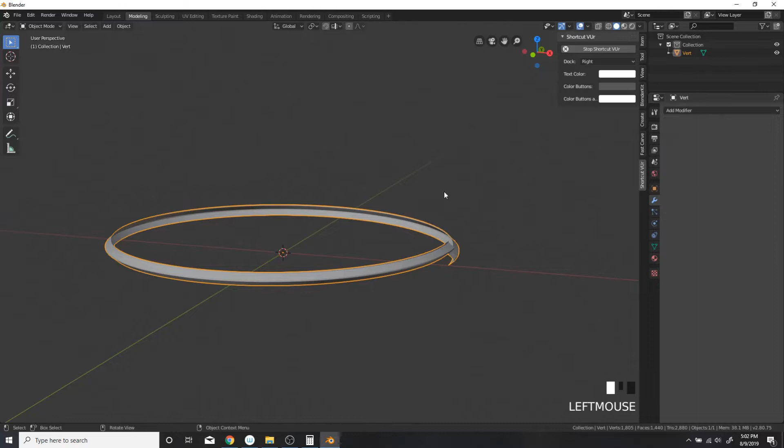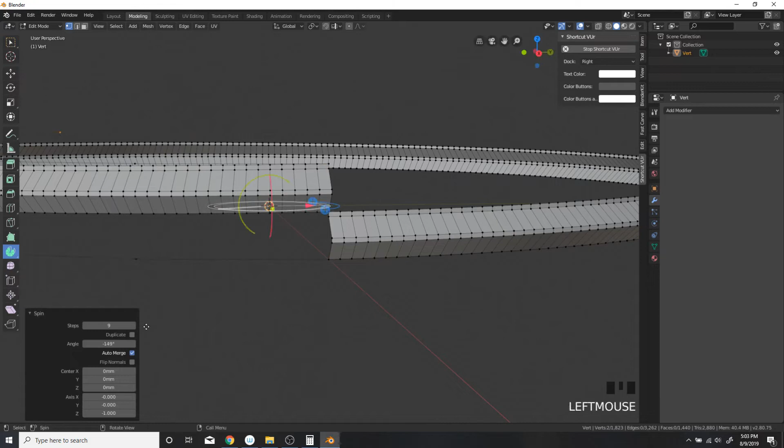Go to edit mode. I'm going to select these top vertices and this bottom one. And then I'm going to do a spin, 360 steps and an angle of 360.

I'm going to select these vertices and this loop and remove this one, and I'm going to do a bridge. I'm going to do a bridge. I'm going to do a bridge. What the? I'm going to select all and do a mesh cleanup.

Merge by distance. And I'm going to select these vertices and select these vertices. Remove these and do a bridge. I'm going to also select this loop and this loop. Remove, remove, do a bridge.

Then I'm going to go to edge, select edges, do a loop cut by 3. Select these edges, do a loop cut by 3. Then I'm going to align these edges.

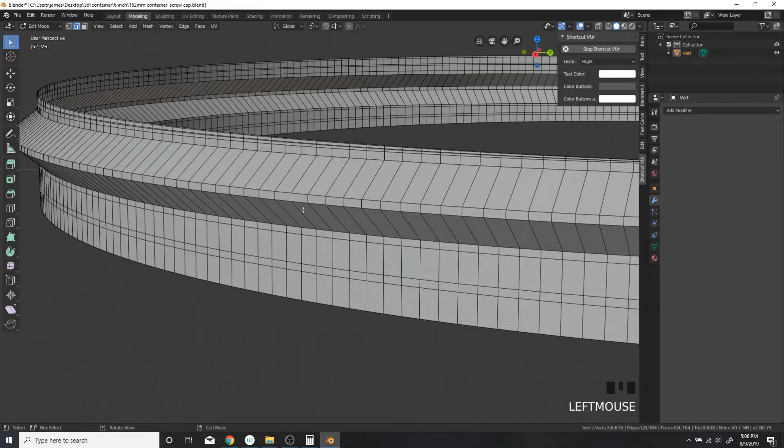Go to edge mode. Select this edge and cursor to selected. Then I'm going to select these again. Go to the top view. Have the pivot to 3D cursor and rotate it, negative 3.5.

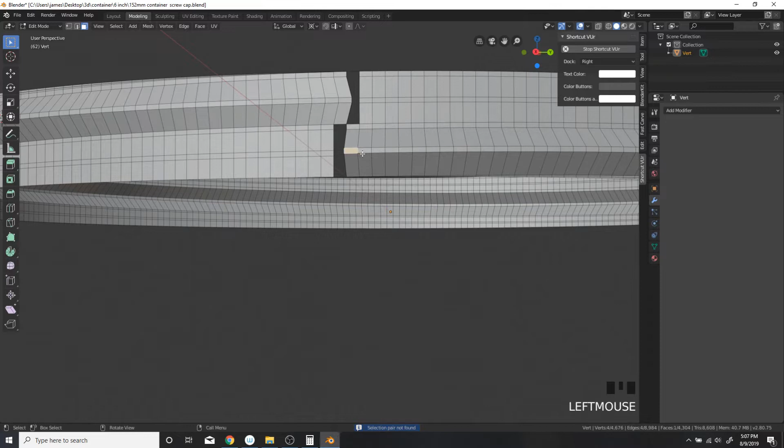I'm going to select these faces: 2, 3, 4, 5, 6, 7, 8, 9, 10, 11, 12, 13, 14, 15, 16, 17, 18, 19, 20, 21, 22, 23, 24, 25, 26, 27, 28, 29, 30. So again, 30 faces.

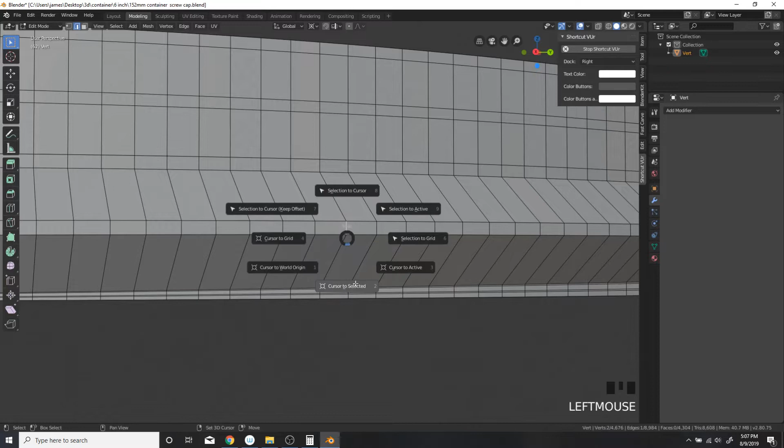And then I'm going to go to edge mode, select this edge, go to cursor selected. Again, select these faces. And then go to top view, rotate 3.5.

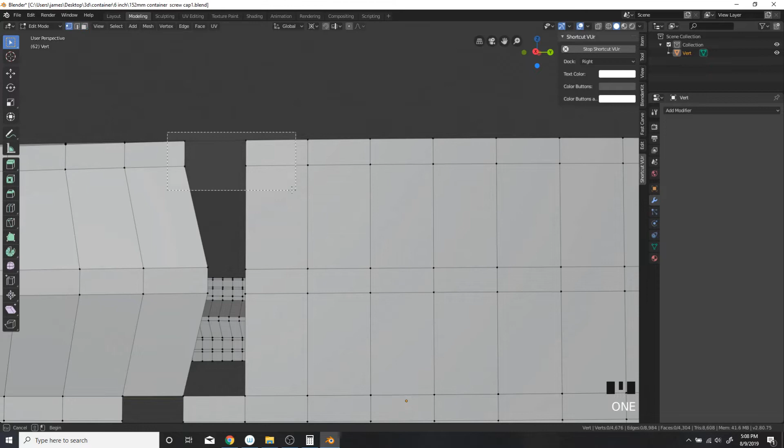Then I'm going to select these faces. I'm going to create faces. Face.

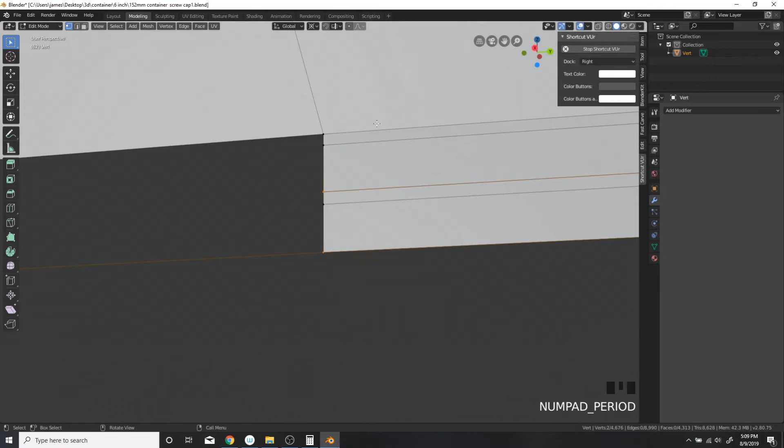Make sure you get the faces on top. Create a face. Zoom in, select those vertices, and create another face.

I'm going to select this loop on the top, and then go ahead and extrude it by 2.5. I'm going to select these bottom vertices and extrude it on the Z by negative 2.5. I'm going to zoom out, go to the front view, select everything, and move this on the Z axis by 2.5.

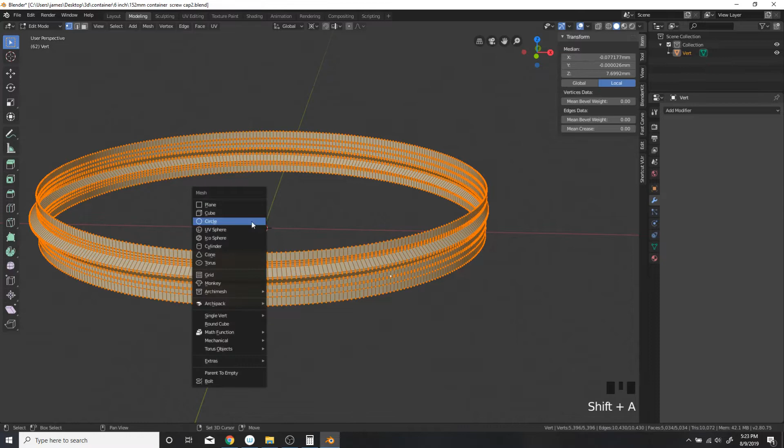Then I'm going to go to cursor to world origin, and I'm going to go ahead and create a circle, 360 for the vertices and 69 for the radius.

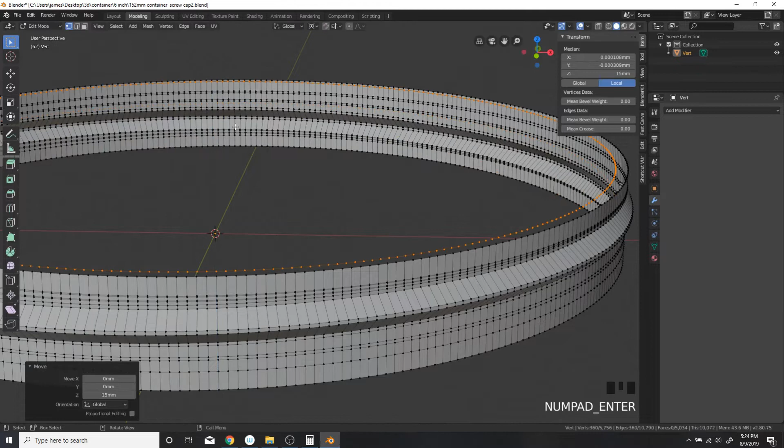Then I'm going to press G, actually move it on the Z axis by 15. And I'm going to select these loops together and bridge them. Then select the bottom one, the innermost loop, and extrude it on the Z by negative 92.

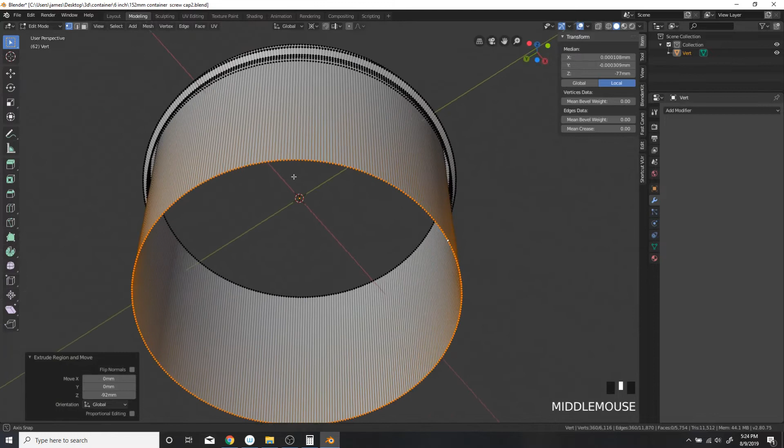And then I'm going to go ahead and create a face. And then create another circle. This one's going to be 76, 360 vertices.

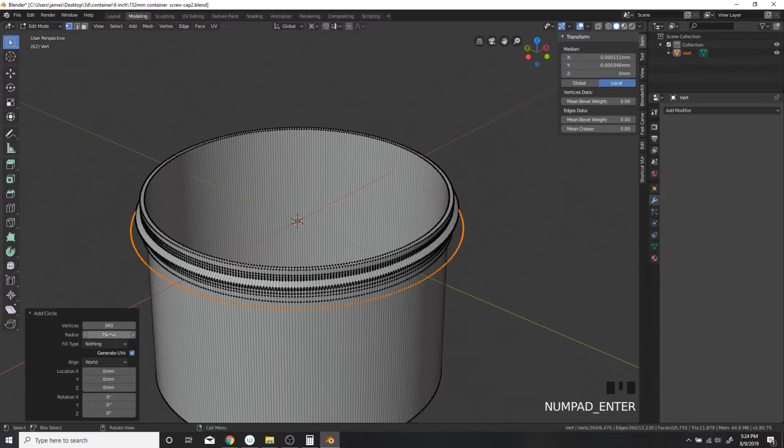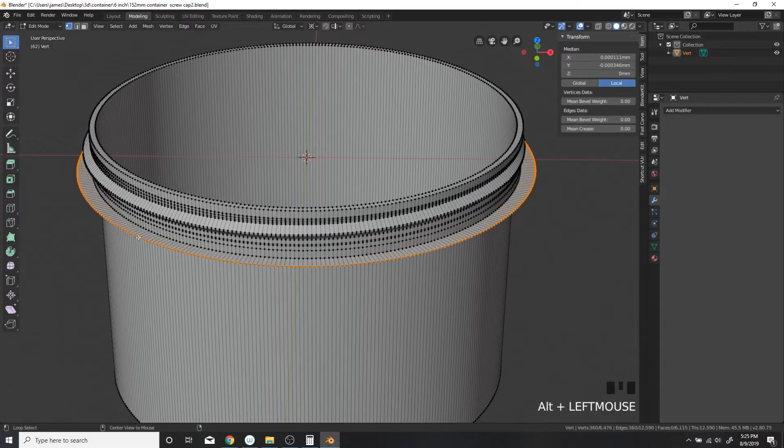And I'm going to go ahead and select this one and this one and bridge them together. And then select this loop right here and extrude on the Z by negative 80. And I'm going to go ahead and create a face.

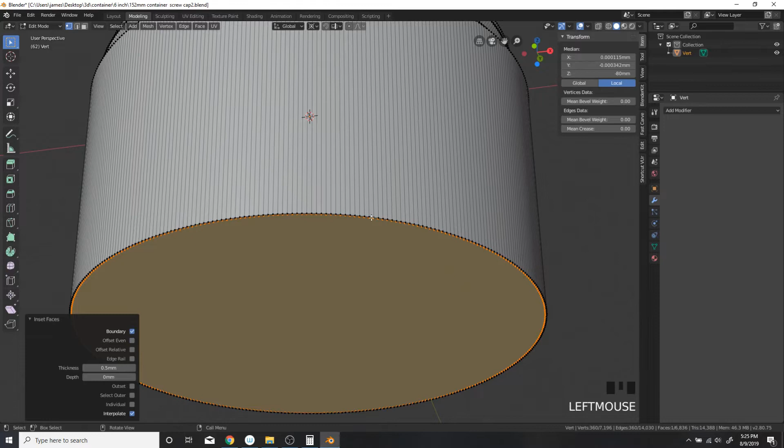I'm going to do an inset of 0.5 and make sure this offset even is unchecked. I'm going to go to the front view, go ahead and do the x-ray, and that's okay.

Okay, I'm going to hide this, go to object mode, and then go to the front view and add another vertex, a single vert. Go ahead and move it on the x-axis by 71.5.

And then extrude 2.5, 0, 2. Extrude on the Z by 0.75. Extrude negative 2.5, 0, 2. And extrude on the Z by 0.25.

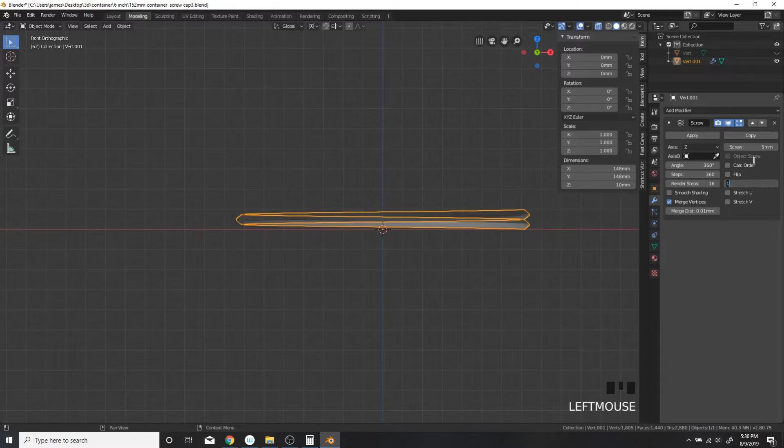I'm going to select it again, go to object mode, go to the screw modifier: 360 steps, 5, smoothing off, merge vertices, and an iteration of 1. Click on apply.

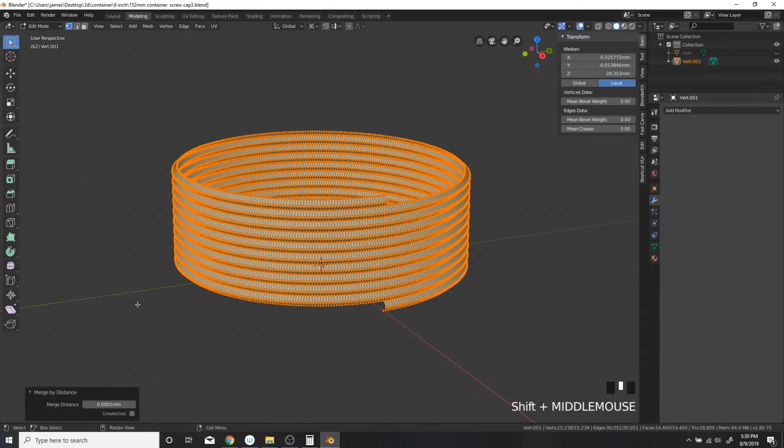Toggle the x-ray off, and then I'm going to do a mesh cleanup, merge by distance. Then go ahead and create—actually you want to go out of edit mode, go to object mode, create a plane. 400. No, 300 is okay.

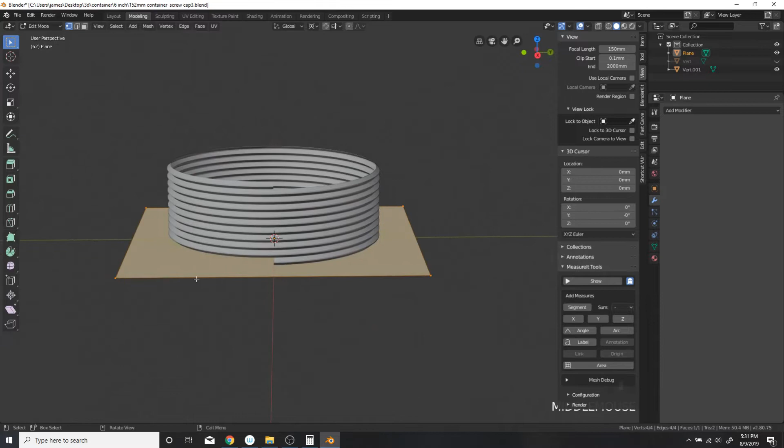2000. Actually, 200 is okay too. 200. Go to edit mode, and then extrude it on the z-axis by 15. Then select all, and move this on the z-axis by 5.

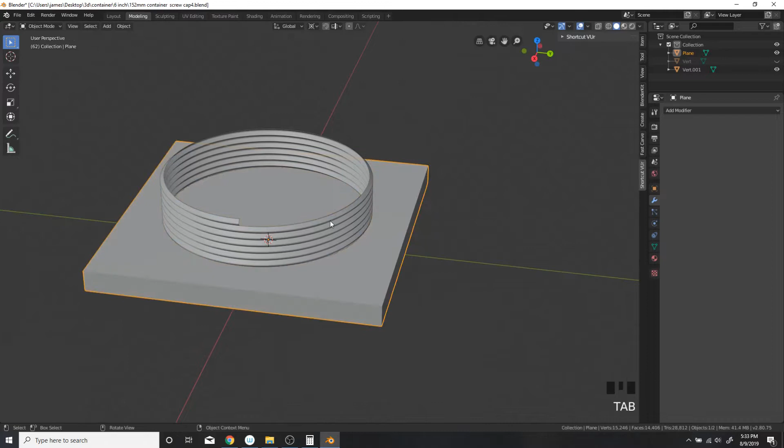And then go to object mode, select the screw, add a modifier, boolean, union—no, actually intersect. Go ahead and use the plane, apply, and then delete the plane.

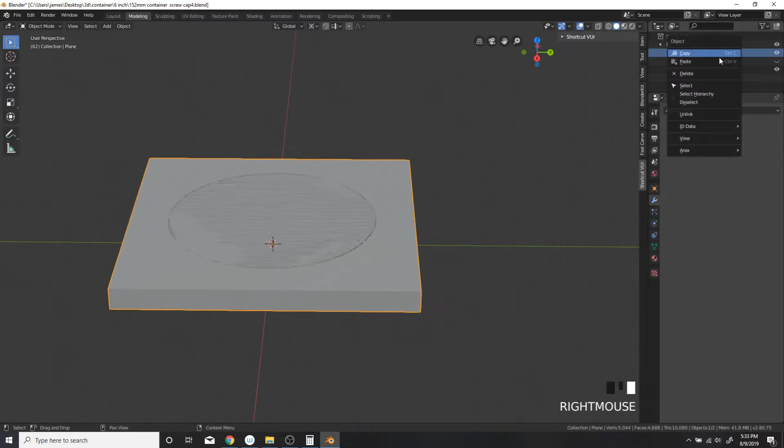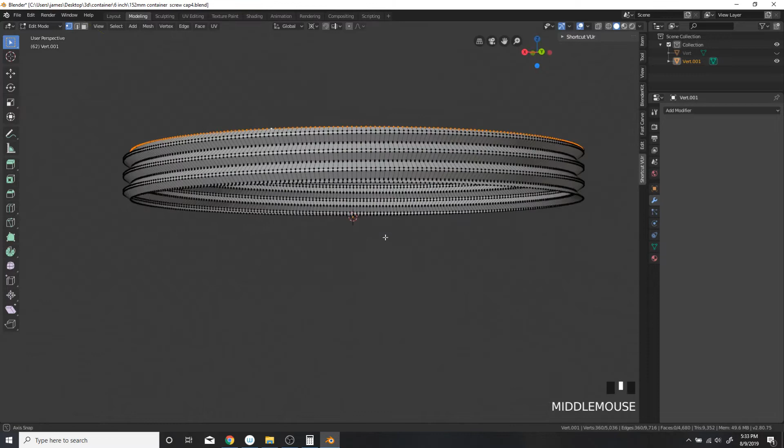And go to edit mode. I'm going to select this face and this face, and then go ahead and delete the faces. 1, 360. It shows that I have 360 vertices right here.

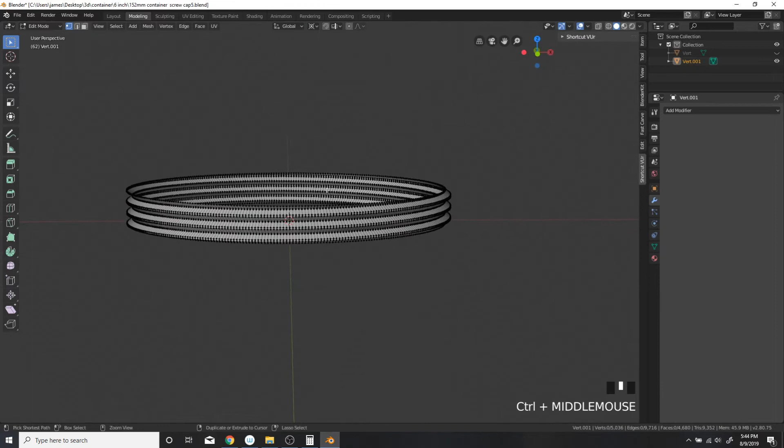And then select all, move it on the z-axis by negative 5. Okay, I am going to select these vertices, extrude it on the z-axis by 6, and create a face.

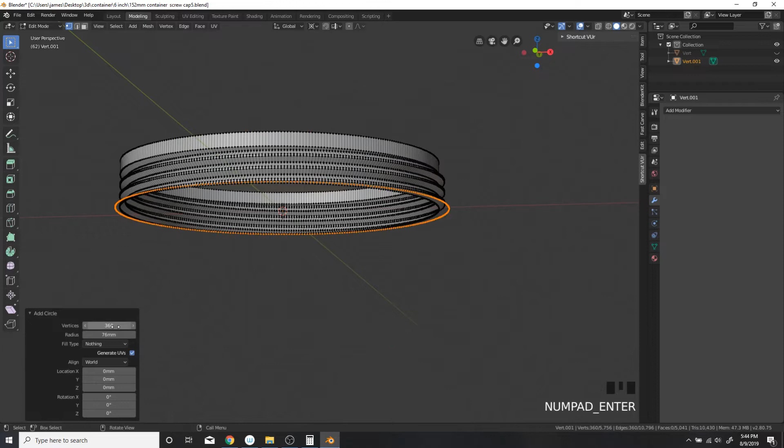And then I am going to create a circle, 360 vertices, 76 millimeters, and I'm going to bridge it together. Bridge. Then go ahead and extrude on the z-axis by 24.

I'm actually going in increments of 8: 8, 16, 24, and so forth for the exterior wall, just because I want to put an 8mm tile on the side for the design. If you don't want any exterior design, you can change the height to anything you want.

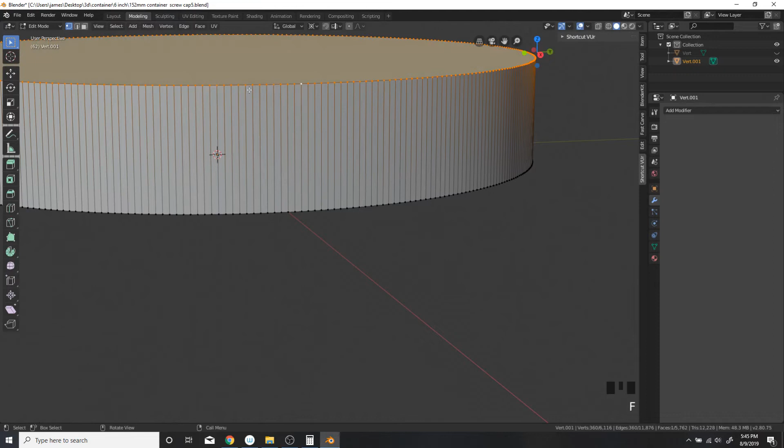And then I'm going to create a face. Then we go to this one, Alt Z, toggle X-ray. Okay, it looks okay.

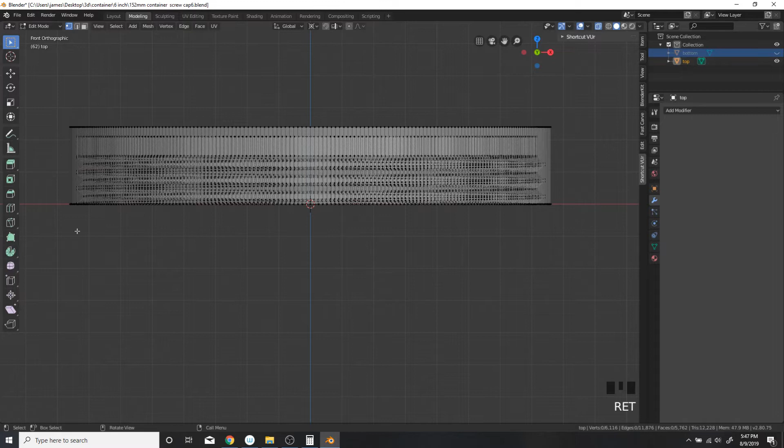I'm going to rename this top, rename this bottom, and then go to object mode, hide this, and create a plane that's going to be 4mm. Zoom and top view.

Edit mode. I'm going to delete only the faces, and then subdivide this into 5 number of cuts. I'm going to create a face.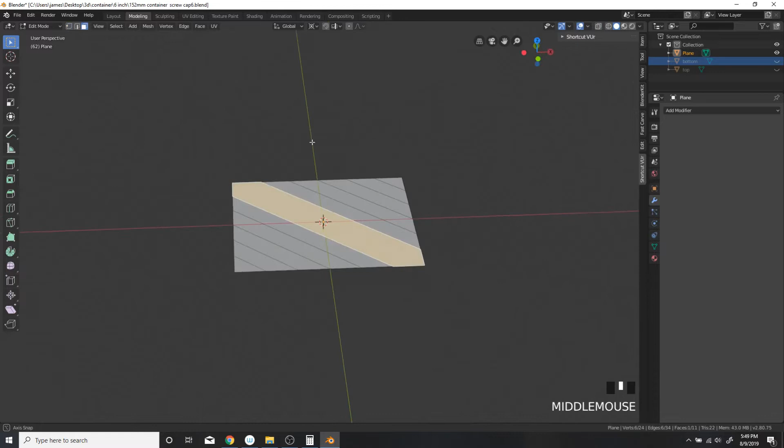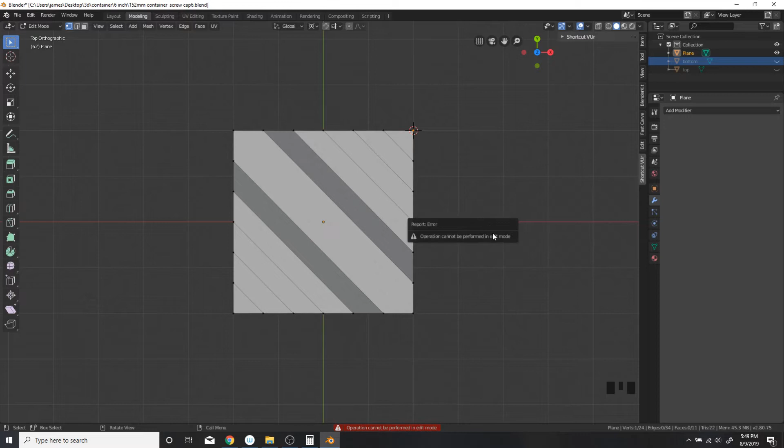I'm going to select this face, move it on the z-axis by 1. I'm going to select this vertex, cursor to selected, set origin to 3D cursor, go to object mode, set origin to 3D cursor, and add a modifier, mirror, on the X and Y, merge, and click on apply.

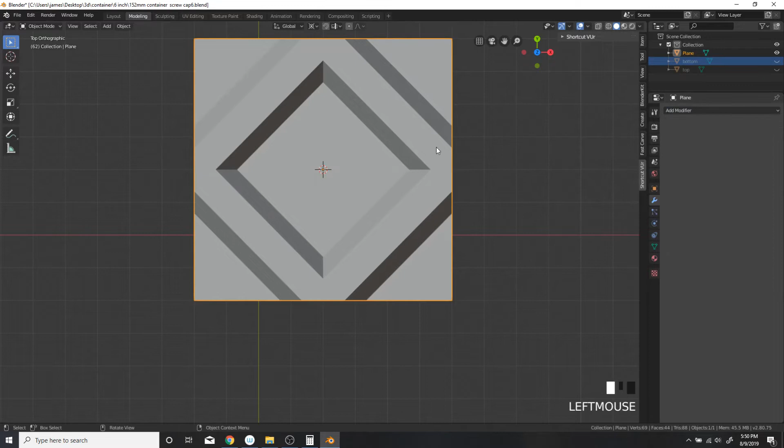I'm going to rename this tile.

I'm going to rotate this on the x-axis by -90 degrees. Press Ctrl-A and zero out the rotation. So this was 90 before, it's 0 now. Let me go to the front view.

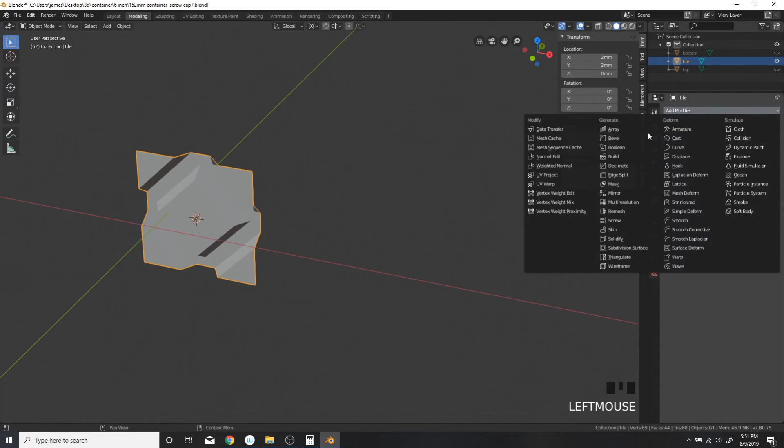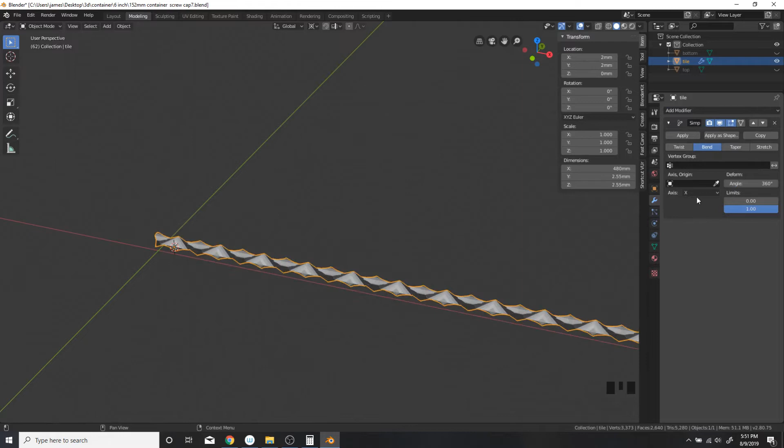I'm going to add a modifier, array, a count of 60. Then I'm going to merge and apply. Then I'm going to do a simple deform, bend, 360 on the X. Click apply.

Then I'm going to duplicate this object. Make sure this link is unchecked, and then hide one. Then I'm going to add a modifier, an array.

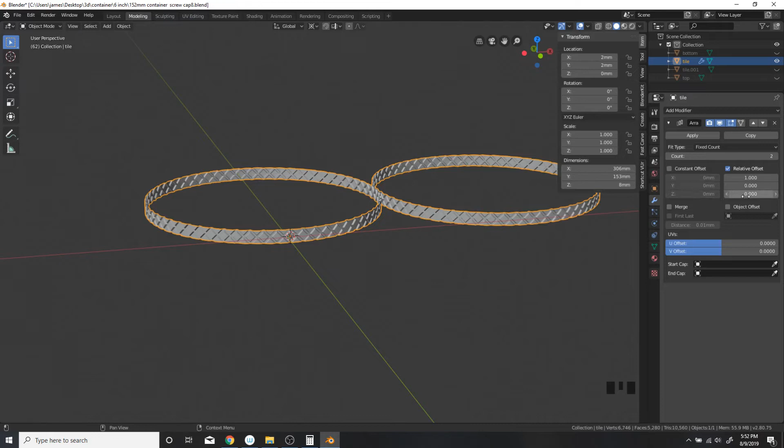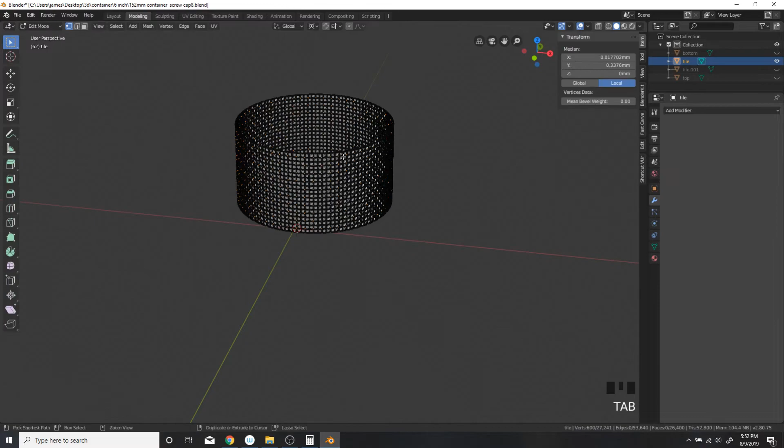This one's going to have an offset of 0 on the X, 1, with a count of 10, and then merge and apply. Then I'm going to set the origin to geometry. I'm going to select all and do a mesh cleanup.

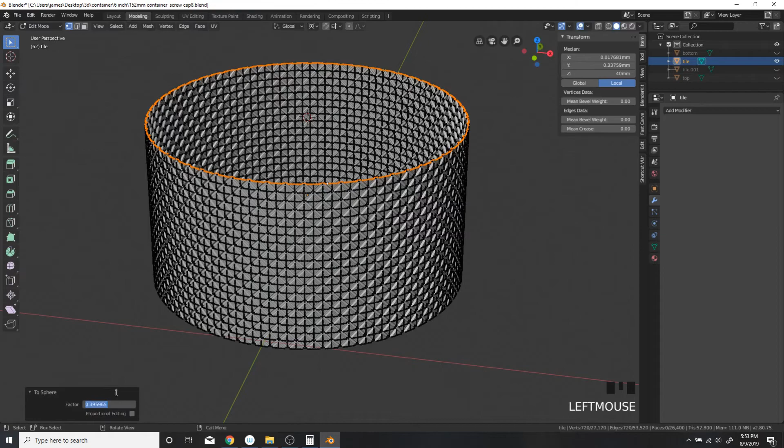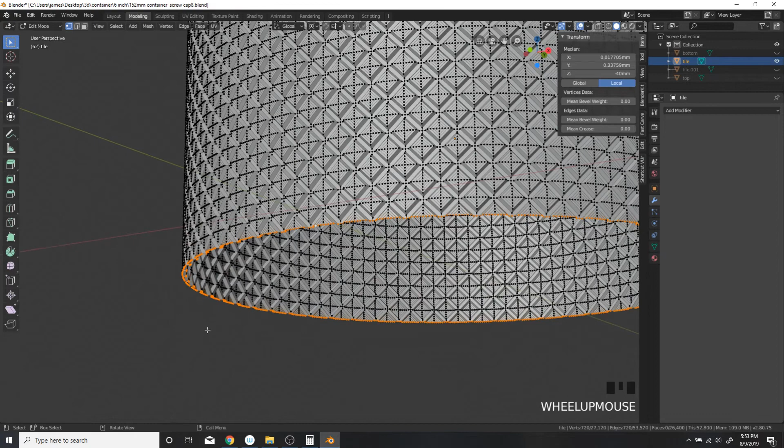Then I'm going to select this top loop, cursor to selected, Alt-Shift-S to sphere, factor of 1. Then I'm going to select this bottom loop... I'm going to select this bottom loop, put the cursor to selected, Alt-Shift-S, factor of 1.

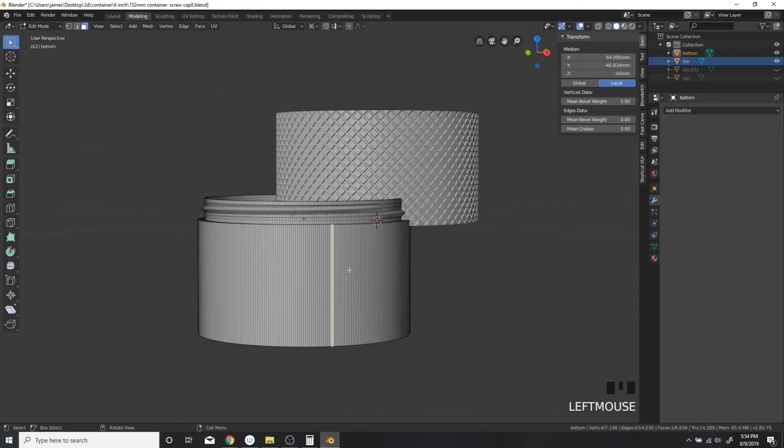I'm going to unhide the bottom. I'm going to select these faces, then cursor to selected, and then delete these faces.

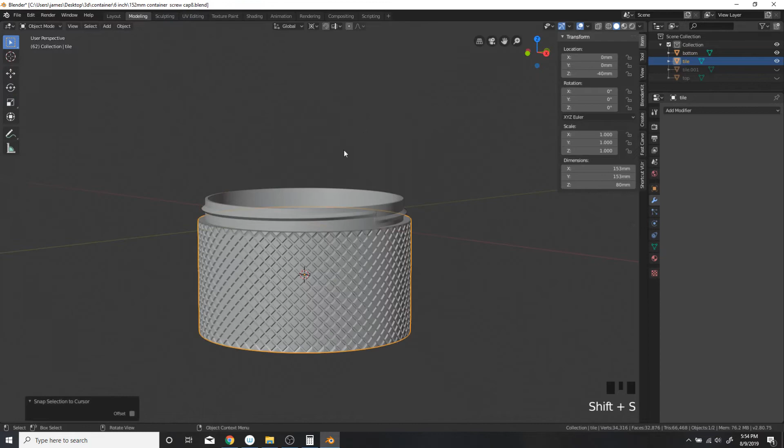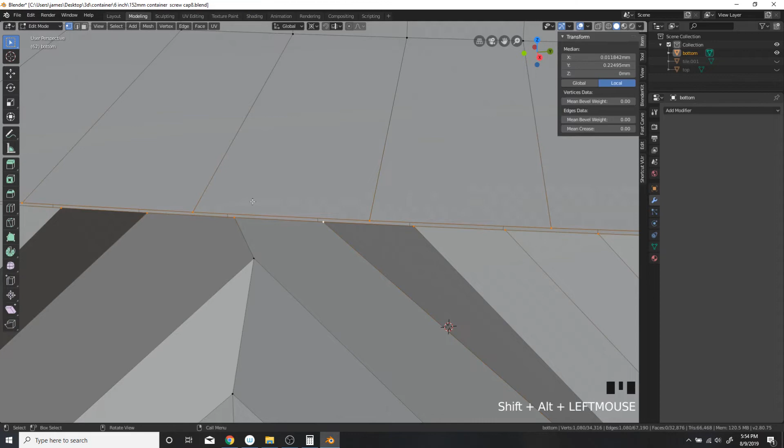I'm going to go back to this tiled object, then selection to cursor. Then I'm going to click on both objects and Control J to join. Go to edit mode, then bridge these loops together.

And then the bottom, bridge. And there you go, we have the bottom piece.

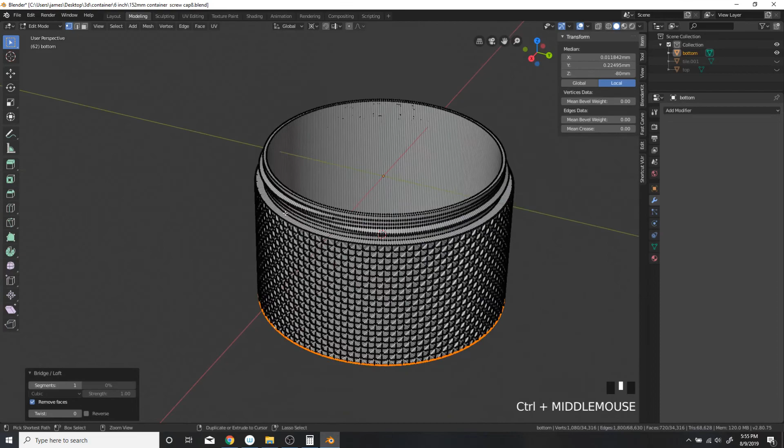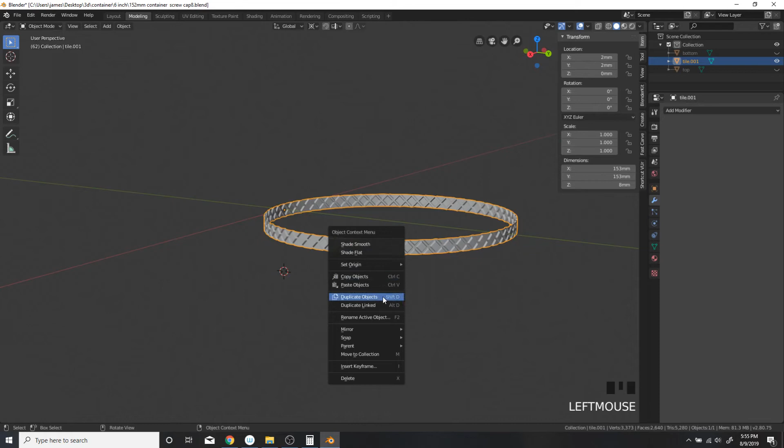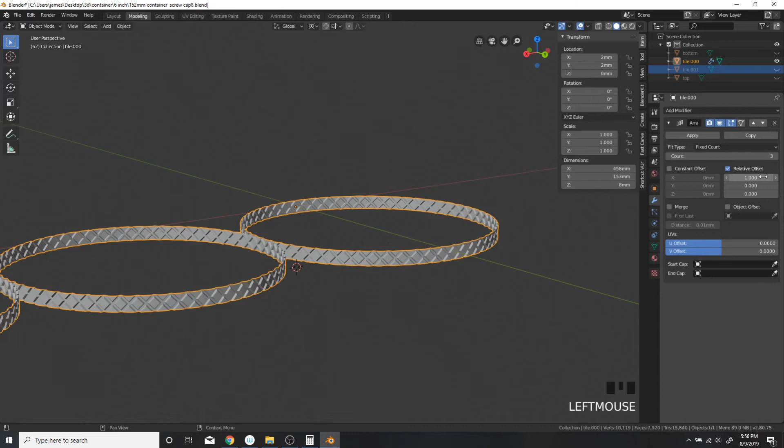Go ahead and create another array. A count of 3, 0 on the X, 1 on the Z. Merge. Click apply.

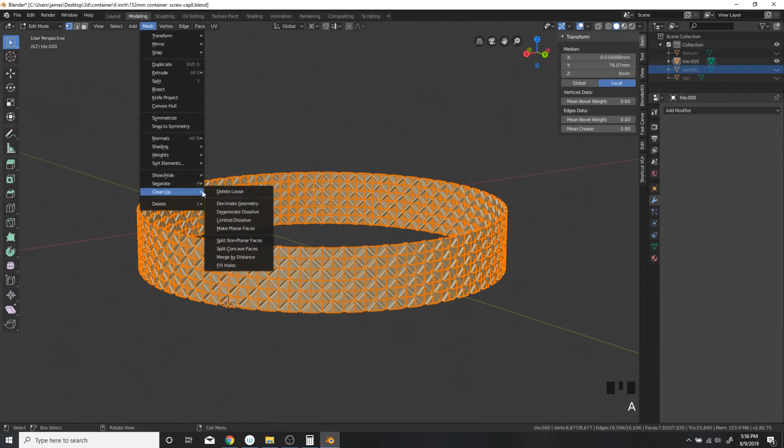Then I'm going to go to edit mode, select all, mesh and do a cleanup, merge by distance. Go to object mode. Shift F3, set origin to geometry.

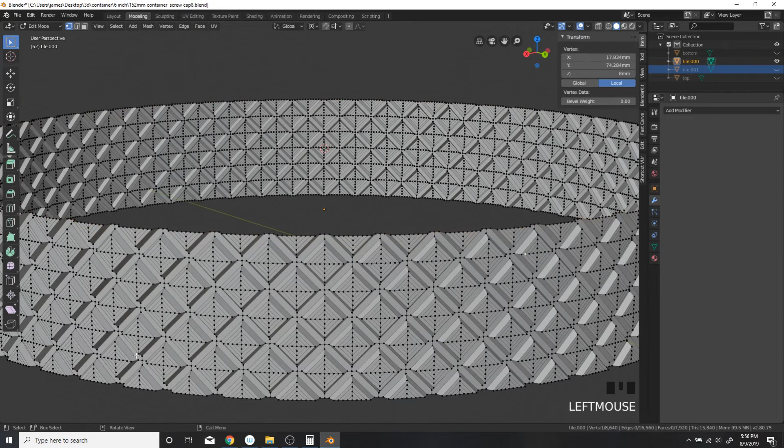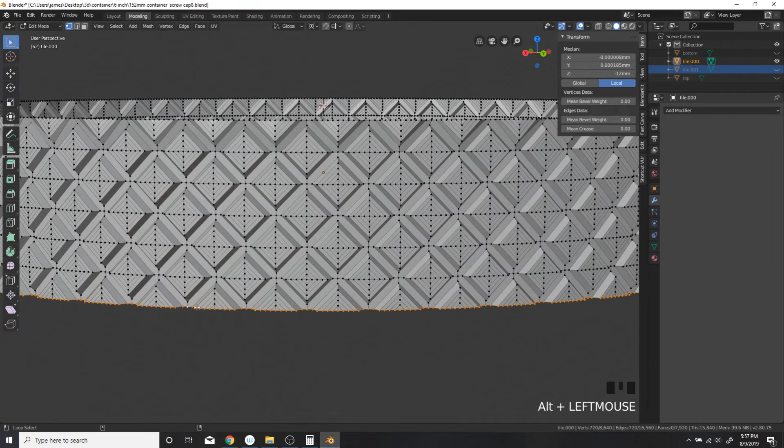Then I'm going to select these loops, cursor to selected, Alt Shift S, factor of 1. Then select this bottom loop, cursor to selected, Alt Shift S, factor of 1.

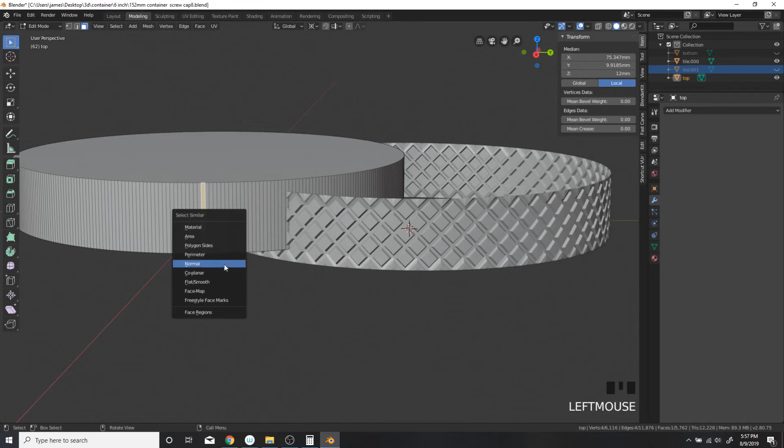I'm going to go to the top, select the faces, normal. Then put the cursor to selected, delete the faces, and then selection to cursor. Select the tiled object and then selection to cursor.

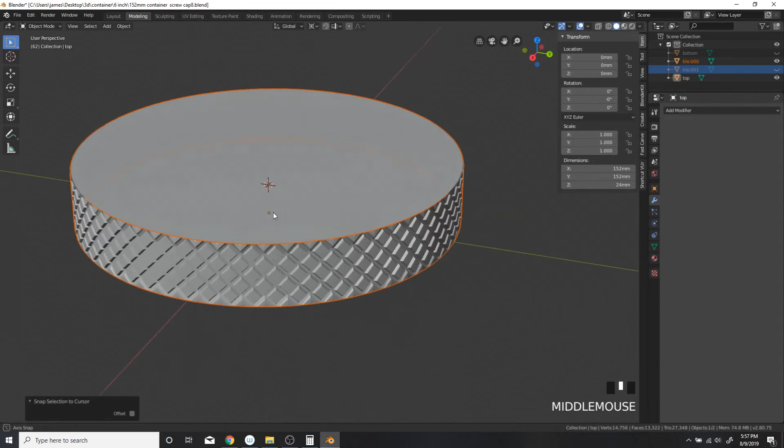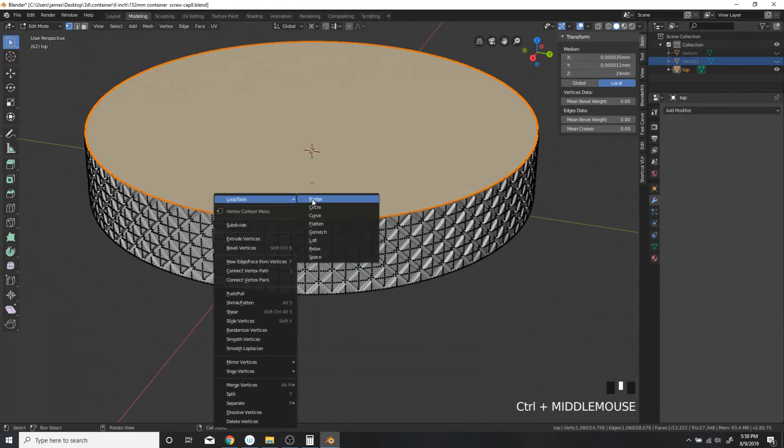Then I'm going to select both objects, Control J to join. Go to edit mode, vertices, bridge. Go to the bottom, select these loops, and bridge. There you go, you have the top piece and the bottom piece.

I'm going to go ahead and export it. STL, selection only. That was the top. And then the bottom. I'll export. Bottom.

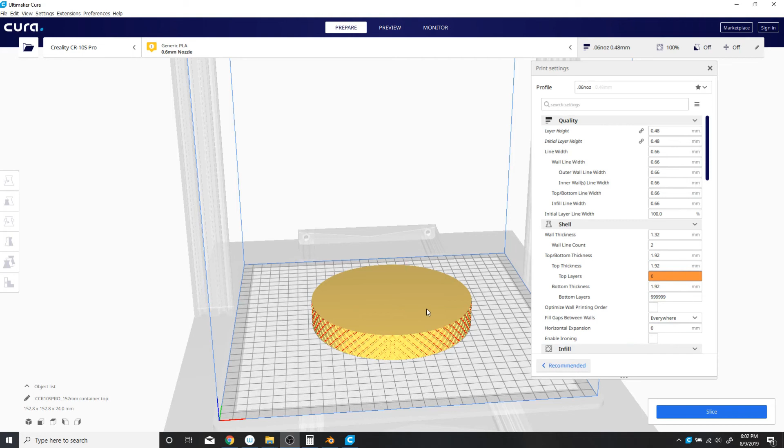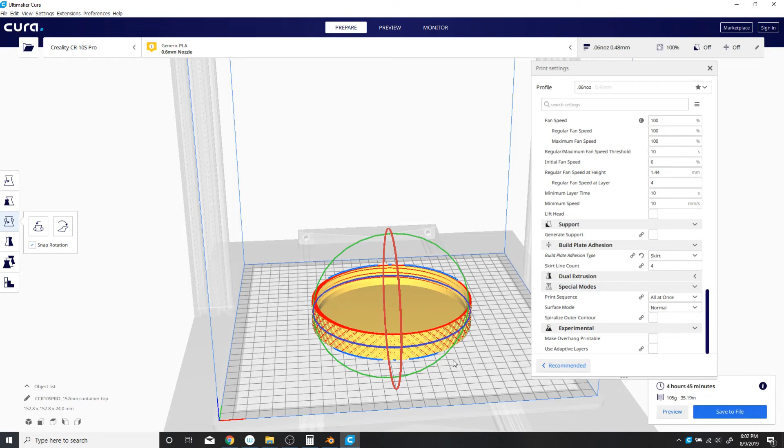Under 5. And then let me open the other one.

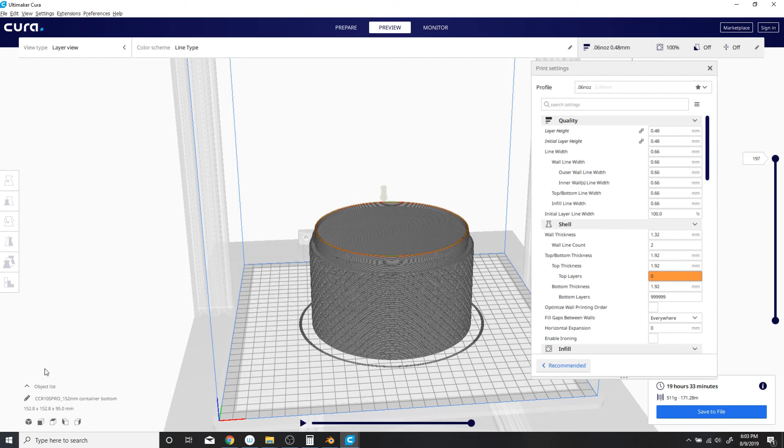There's an error on the file. Tab, select all, I'll do a mesh cleanup. Merge by distance, 0. Then I'll do mesh, and then normals, recalculate the outside.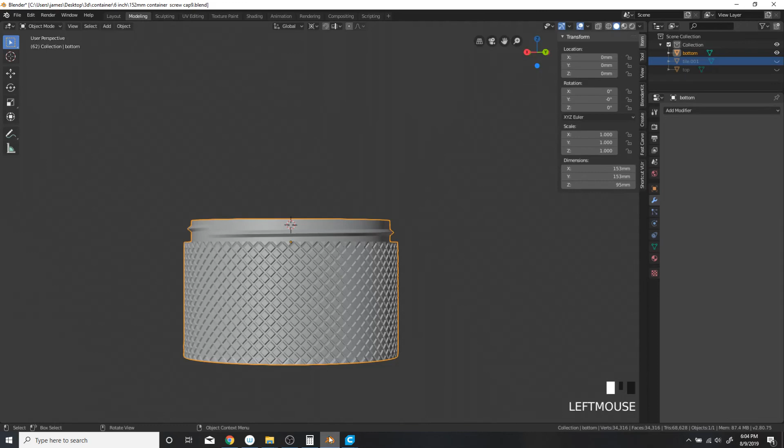File export STL. Hold on, let me go back. File export STL. And then export. This is out.

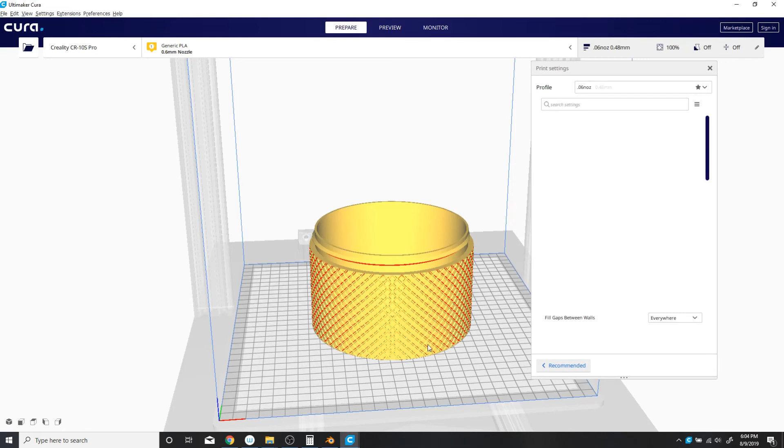For prints this big, or this big of a volume, you want to actually do a preview and see if there are any errors. Because as you saw previously, on the other one there was a yellow marker here, which was a top and bottom, and it shouldn't have had a top. It should be open like this.

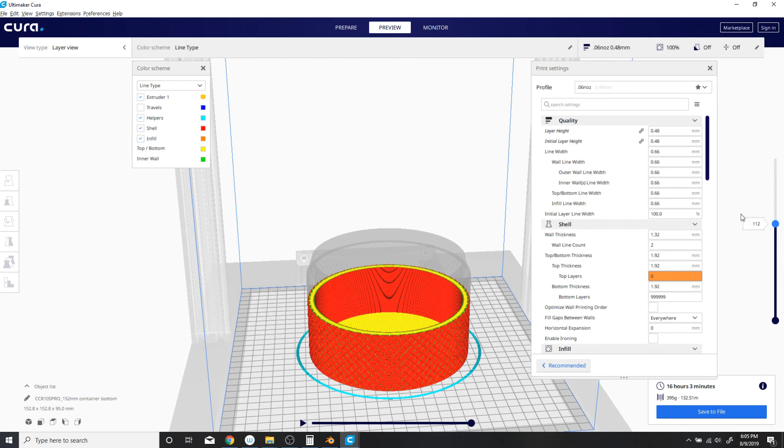So let me go back down. It sometimes does that, but then 395 grams. And if you actually print it with the top, you just wasted 395 grams of filament.

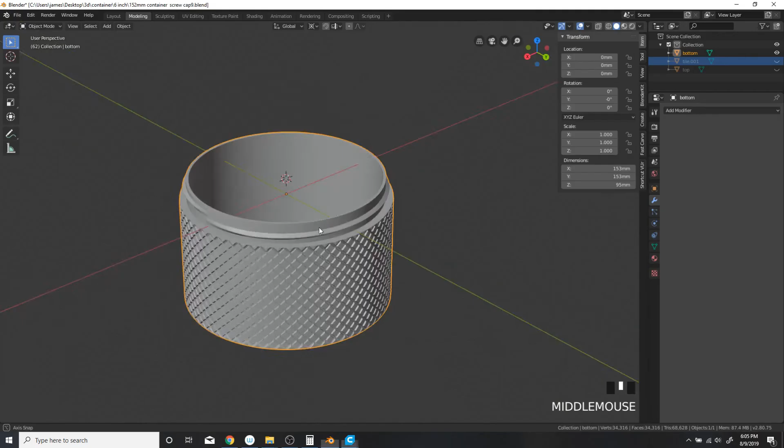Again, sometimes it does that error, so you want to have the... See, on Blender it doesn't show the error, but when you go ahead and start slicing, there was the error on top. Let's preview this one. Cancel. See, this one looks fine, it doesn't have the top.

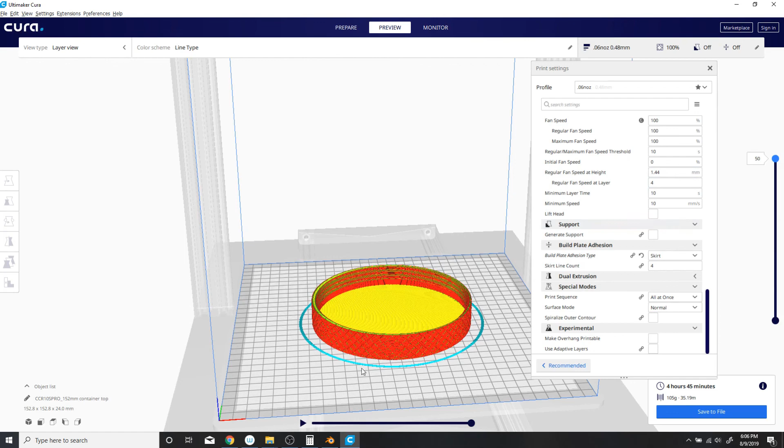So if you have an error, just go ahead and go to the mesh and then normals and recalculate the outside. And then usually that clears it up.